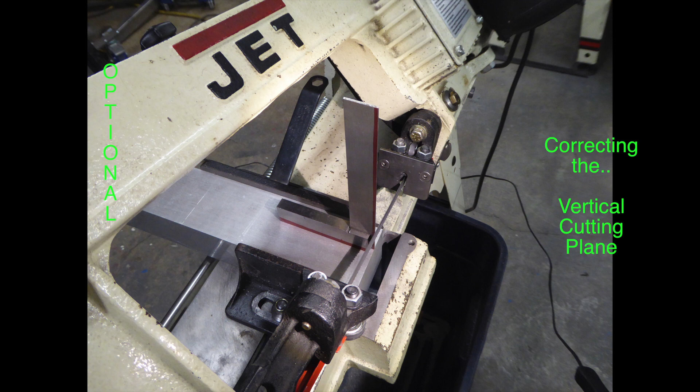However, manufacturing tolerances prevent that on some saws, and they cannot, as provided, make a square cut without shimming the stock, which is highly undesirable.

One method to accomplish an adjustment of the vertical cutting plane is discussed in this video, Adjustments Part 3A. Depending upon the accuracy of your particular saw and what you use it for, you may choose to leave your saw at its as-purchased accuracy. Everything is a compromise on a saw that reaches its goal of having both a horizontal and a vertical cutting mode.

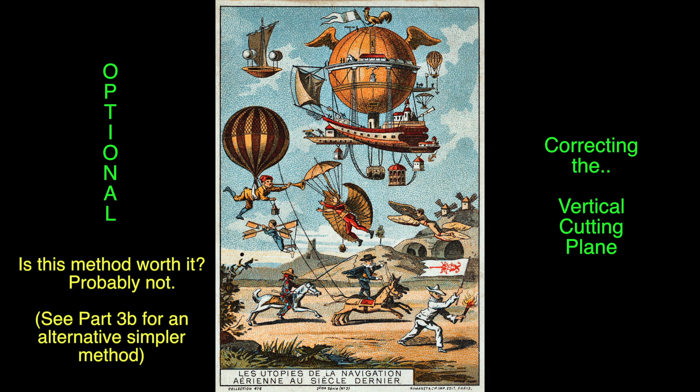This is done by twisting the blade at two points in the blade path around the pulleys. No saw, or any tool in fact, is perfect. It just depends upon how accurate you require it to be.

Perhaps the most common use of this saw is to chop steel angle and then weld it together with a MIG or stick welder that will bridge the gap left by a less than square cut.

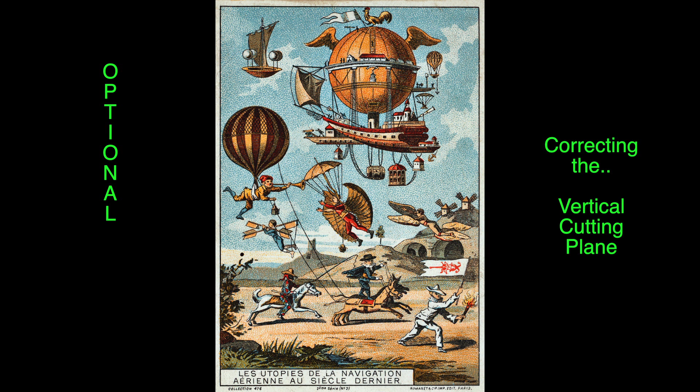Because the saw is so easy to adjust the miter to give you a perpendicular cut to the vise, the vertical cutting plane will most often be left as the saw is provided.

One of the reasons why this is optional or considered extreme is that the adjuster mechanism is not a part you can make without some machining tools or employing a machine shop.

The method I have devised is only one way to accomplish this. You may be able to come up with a simpler idea.

Because the saws may vary, especially between brands, it may not be a good product for a CNC shop to produce in volume. The actual turning of the parts is covered in Modifications, Part 2.

This is the relationship of the vertical plane shown with the square sitting atop the stock I just cut.

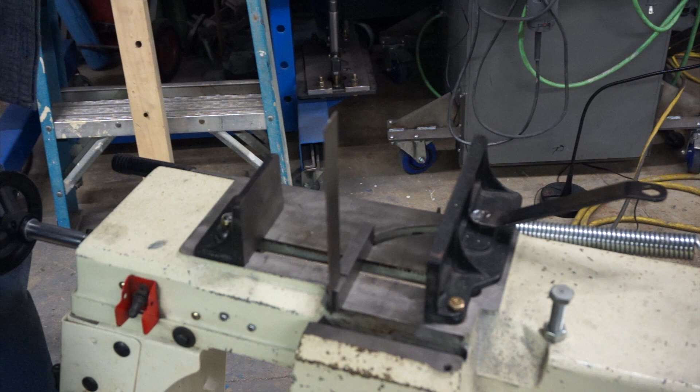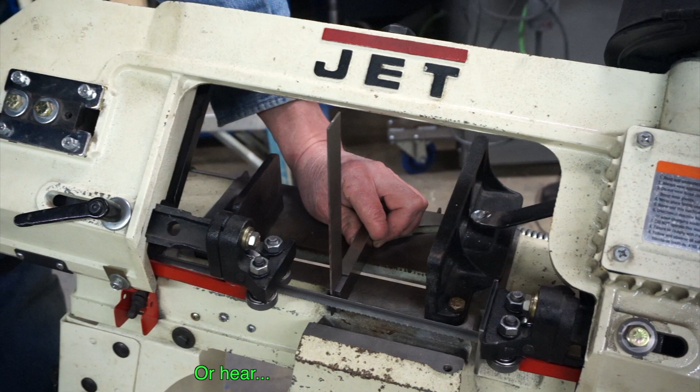Here is a fast way to check your saw. Obviously, cutting actual stock is the best test if the rest of your adjustments are correct, but it's time-consuming. Note at the end of this side view, you can see the blade touch the bottom of the square, because the saw was poorly aligned.

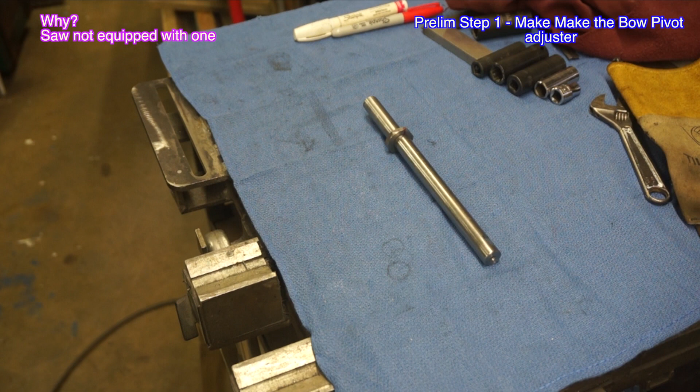This is the prototype bow pivot adjuster. An interesting characteristic of the saw is that the bracket hole on the table base, near what they refer to as the pivot, is actually larger than the hole on the other side. The spring holds it to the front side of the hole. By default, this gives us some leeway to play with the axle shaft on the other end.

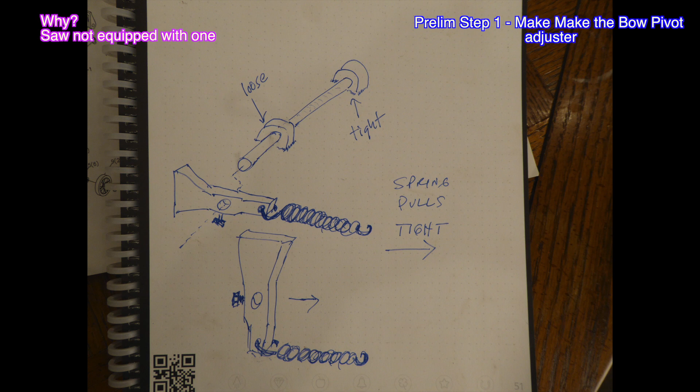I do that with an eccentric bushing. The main part of the shaft could be the original shaft with a modification. I made this one from stock.

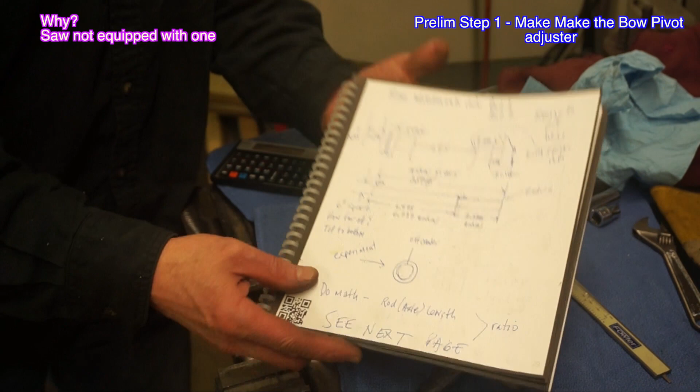These are the original sketches I made with measurements.

Here is an animation of the part modeled in Fusion 360. Note the eccentric action.

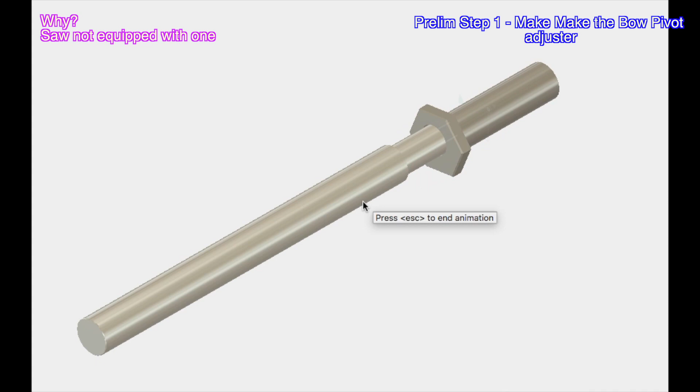I didn't want to fight Fusion's drawing module today, so here's a sketch of my final dimensions that fit my particular saw.

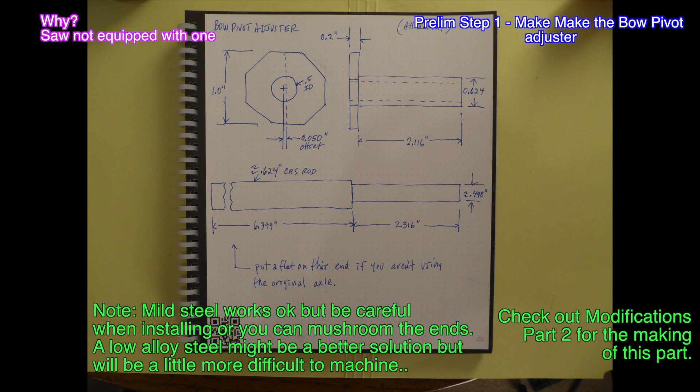I determined that making the hex portion of the bushing 1/4 inch instead of 2/10 of an inch makes it considerably easier to adjust.

We are going to be working with all of these pieces. There will be detailed instructions, but study the way the parts go together here for a minute or two.

In the lower left of the slide is a photo of a correctly adjusted saw. You should note the relationship of the top of the castings.

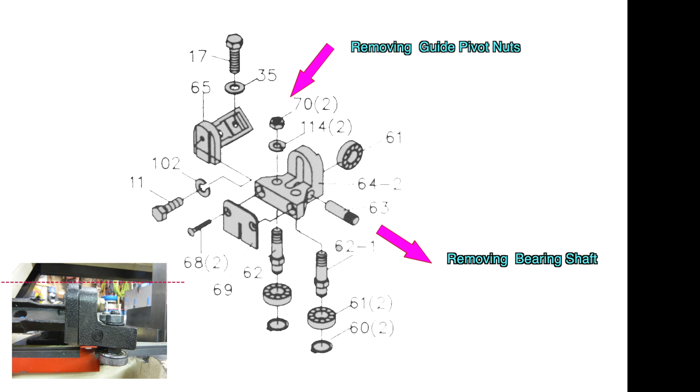We are going to adjust the verticality of the cut first, but we need to make two preliminary adjustments to the blade guides initially so that the rear bearings do not get in the way and so that there is not a twist in the blade between the two adjusters.

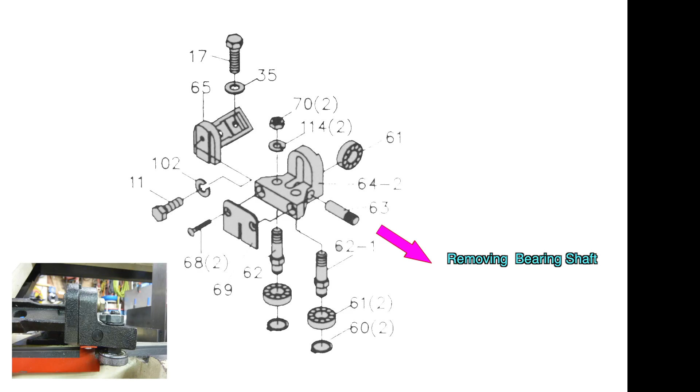You'll need one of these or something similar to it. The hole is just for storing it on a hook.

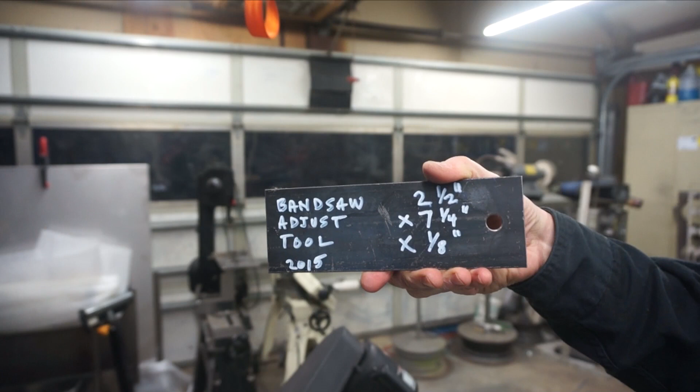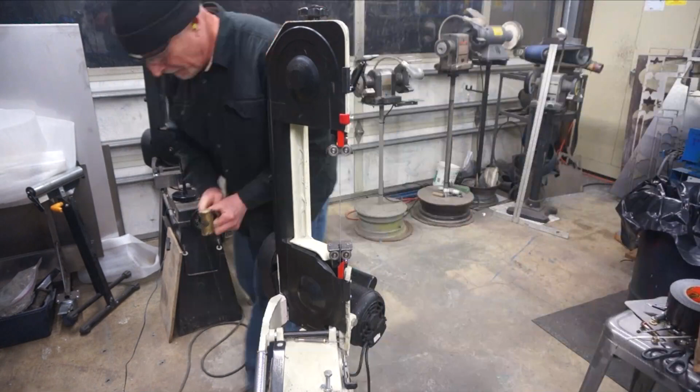This is one method of installing the blade guide adjuster tool. If you haven't already, remove the upper bearing pivots. The bearings will stay in place but be loose.

Remember the picture in the lower left corner back on the parts diagram? The key here is to set the equal length pivot ends flush on the adjuster tool while keeping the outer bearing races above the teeth.

Do the other adjuster in a similar fashion. We are doing this temporary adjustment to prevent a twist in the blade between the adjusters during the testing process. We will set them with the top bearings in place in part 4.

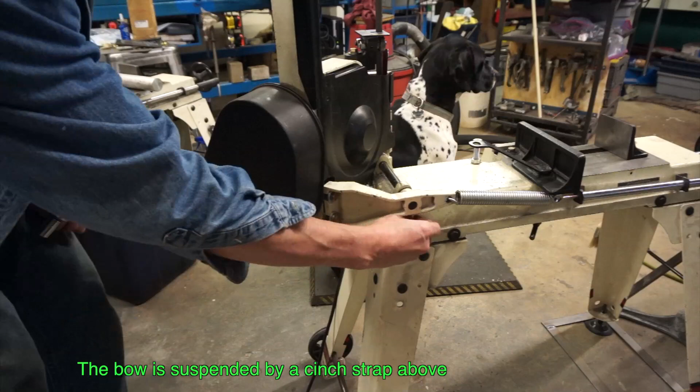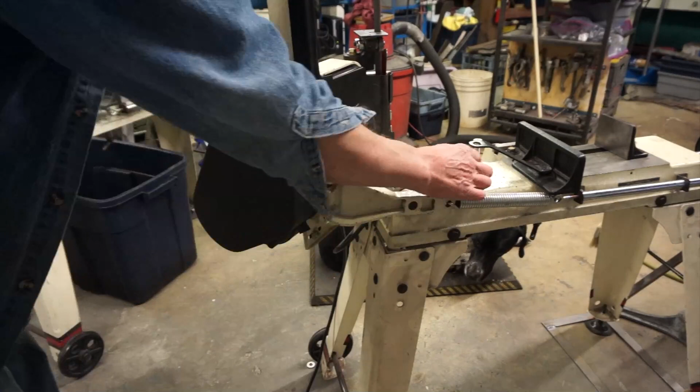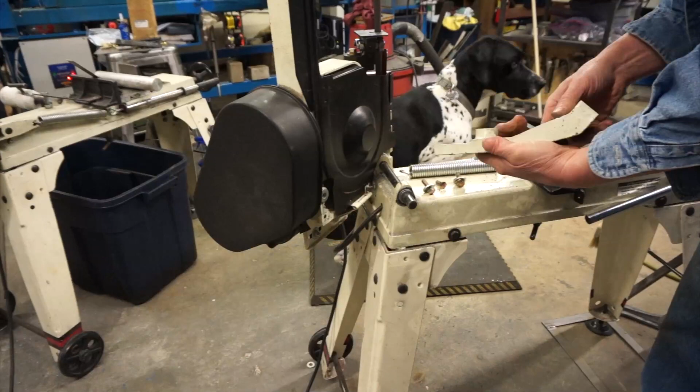For some reason, this clip stopped before I removed the shaft, which is just a matter of driving it out from the other side. Oh, here it is from another table I did later.

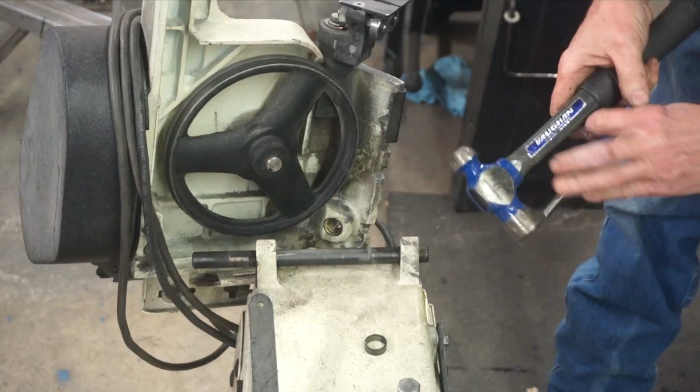I had test fit everything before this installation process you're going to see here in the next couple of clips. Unfortunately, after I Loctited this bushing into place, I got called away for a few hours, and you'll see when I come back I have some work to do to actually make the adjustment.

You should realize that, like a gunsmith that is improving a rifle for competitive shooting, this is not a bolt-in process because the dimensions of every saw are unique when you are chasing accuracy.

These parts need to fit snugly, but not too tight. Depending upon the dimensions of your saw, a 1/2 inch and a 5/8 inch reamer could come in handy.

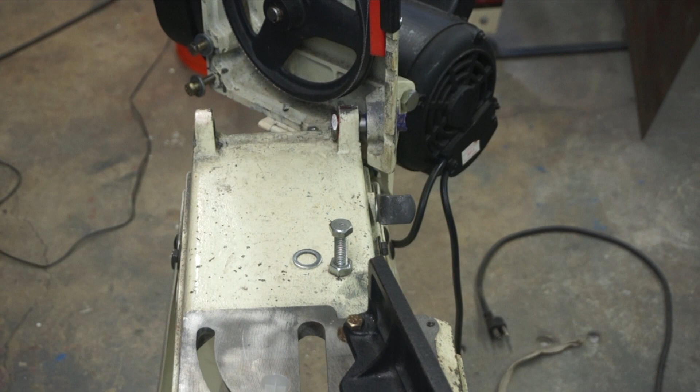By changing the geometry here, your saw may use anywhere from 0 to 2 washers behind the pivot arm. You may also need a spacer between the pivot arm and the bow. This is to prevent putting a lever force on the pivot shaft.

This saw used two 11-gauge spacers. The saw I did after this one required no spacers and no washers.

Here's a sloppy video of my plasma table cutting one of the spacers.

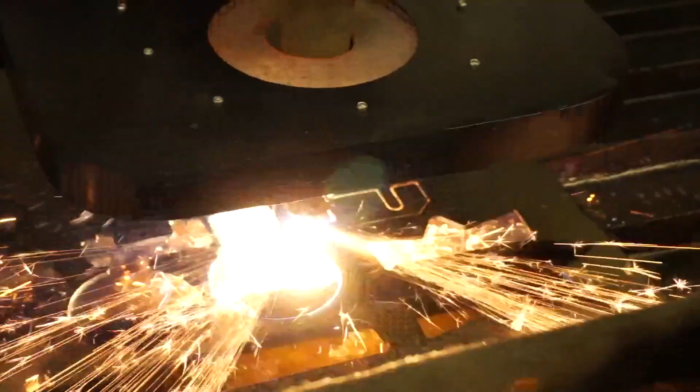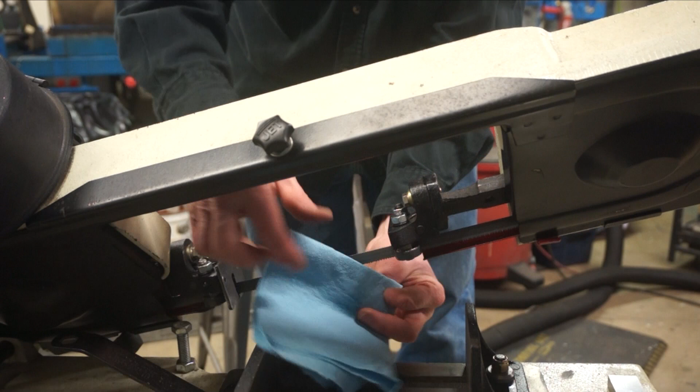Here I'm spacing the blade out with 2 layers of duct tape so that the teeth will not hang up on the square during the vertical drop test.

The camera angle is not very good here, but you will rapidly be able to determine whether the blade is hitting the square at the top or the bottom of your normal cutting range.

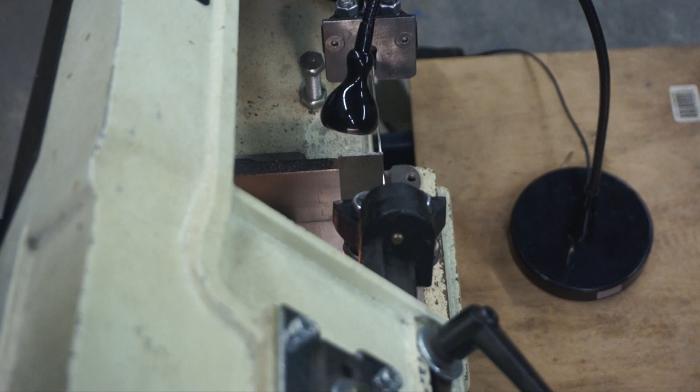This saw had a significant gap at the top of the range of cutting, which required me to turn the eccentric bushing to raise the shaft on the blade end of the shaft.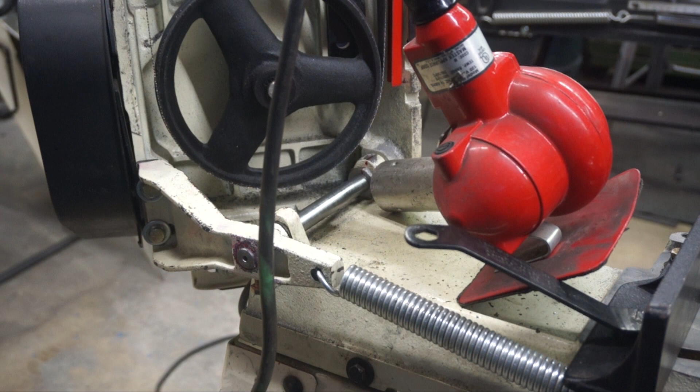And here's where I came back a few hours later and had to heat up the Loctite so I could actually make the adjustments.

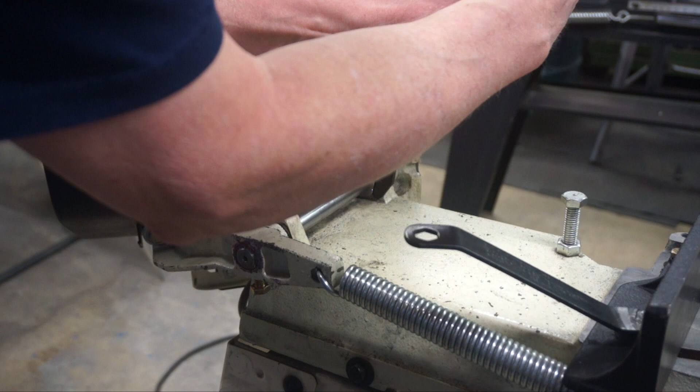The test and adjust process was repeated 3 times on this saw to achieve a satisfactory vertical cutting plane. At this point, I allowed the Loctite to cure.

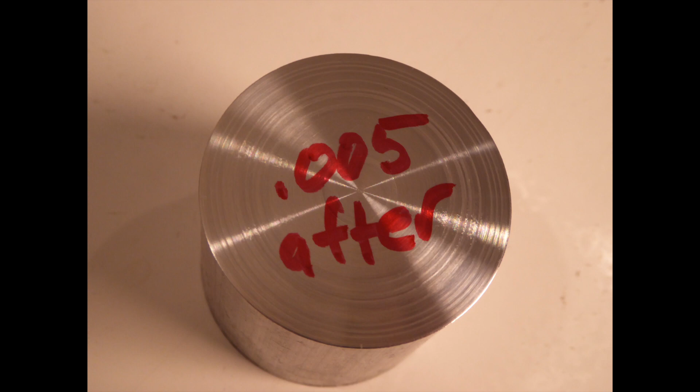This last picture is a 5 thousandths skim cut on a chunk I cut after correcting the vertical cut path of the saw. Just enough to remove the teeth lines from the bandsaw blade. There is no discernible error in the cut path.